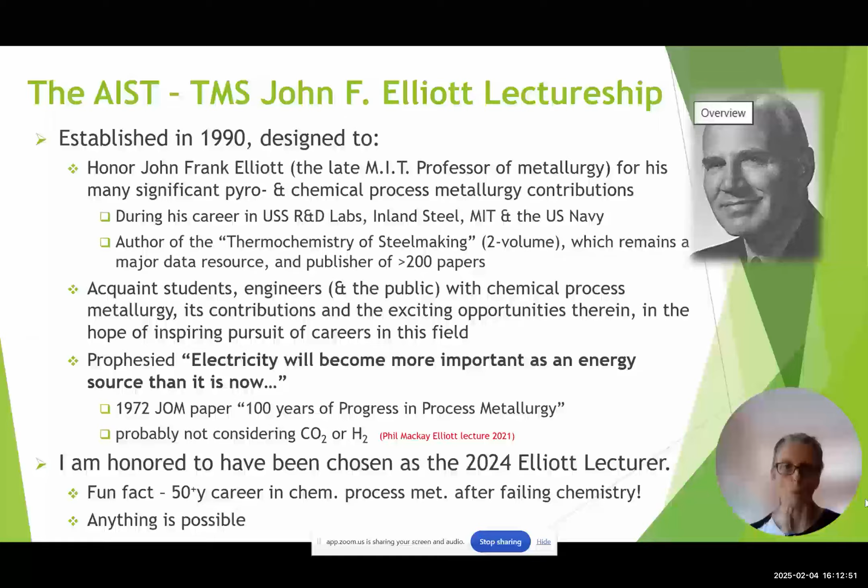Why green steel revolution? Net zero emission steelmaking using non-fossil fuel energy sources is the definition of green steel that I'm taking. Zero emissions iron making is crucial to greenhouse gas mitigation. Currently, it's not cost effective with fossil-based fuels.

The world is currently missing the 1.5 centigrade global warming target, which increased by 5 gigatons in 2022 over 2021. 34 gigatons came from the combustion of coal, oil, and natural gas. So why the green steel revolution?

The 2015 plan is to convert 800-year-old carbon-based blast furnace BOF steelmaking to electrically based 60-year-old EAF steelmaking and make major changes to its operations: carbon-free electricity, hydrogen-reduced iron, and green carbon and consumables. Increasingly disinterest and inability to comply with the solution is motivating out-of-the-box thinking for iron and steelmaking solutions.

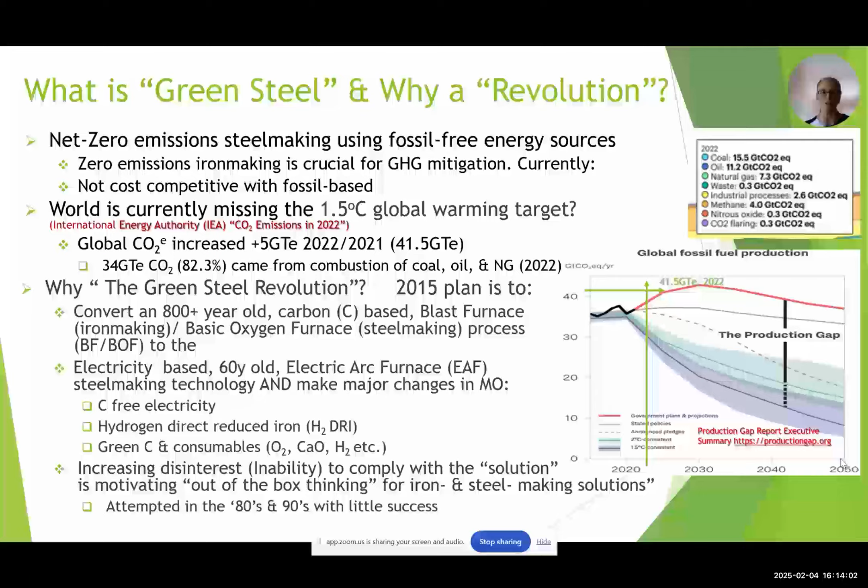Current steelmaking, from Zulhan 2013, it's a great chart: blast furnace steelmaking to a BOF, smelt reduction to a BOF also through a smelter, direct reduction in its various forms, be it shaft, rotary hearth, rotary kiln, or fine ores through the FinMet type process, to an EAF, and scrap 100% to an EAF. As you can see at the bottom here...

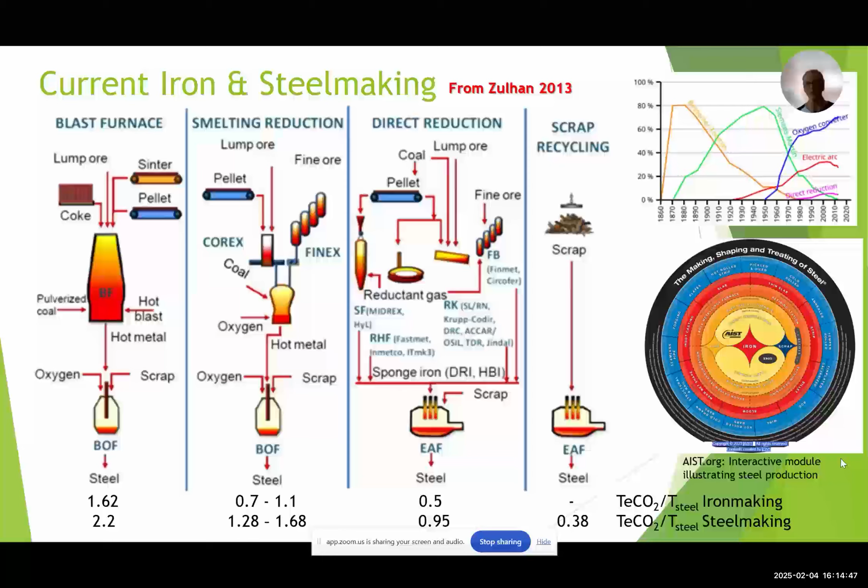The 2.2 tons of CO2 per ton of steelmaking drops down to 0.38 when we're looking at EAF steelmaking. And the right-hand globe here is the AIST's interactive module illustrating steel production, which you can access on their website.

I'm not going to go through this, but basically I'm showing the amount of carbon interactions in these equations for both the blast furnace and the EAF. So we're very dependent on carbon.

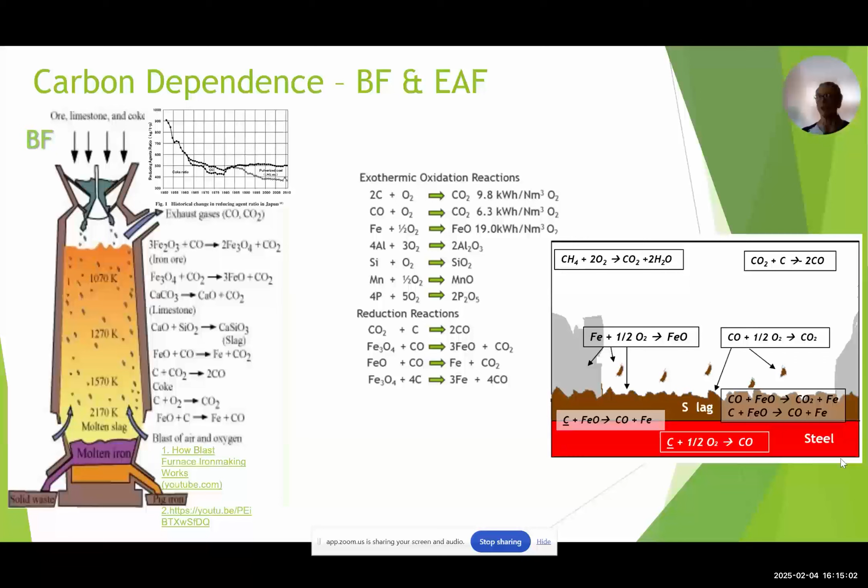The Paris Accord is demanding 0.2 tons of CO2 per ton of steel by 2050, and we're now at about 1.7. The major emissions, as you can see from this table, are from the blast furnace at 1.2, secondly from the coke ovens at 0.79, and thirdly from the EAF, but it's down at 0.24.

The chart here just shows the red blast furnace BOF steelmaking for various countries making over 10 million tons a year. The green is the EAF contributions. And as you can see, China is almost 54%, down from 57%, but it's also the largest contributor of greenhouse gases to the world at 28%.

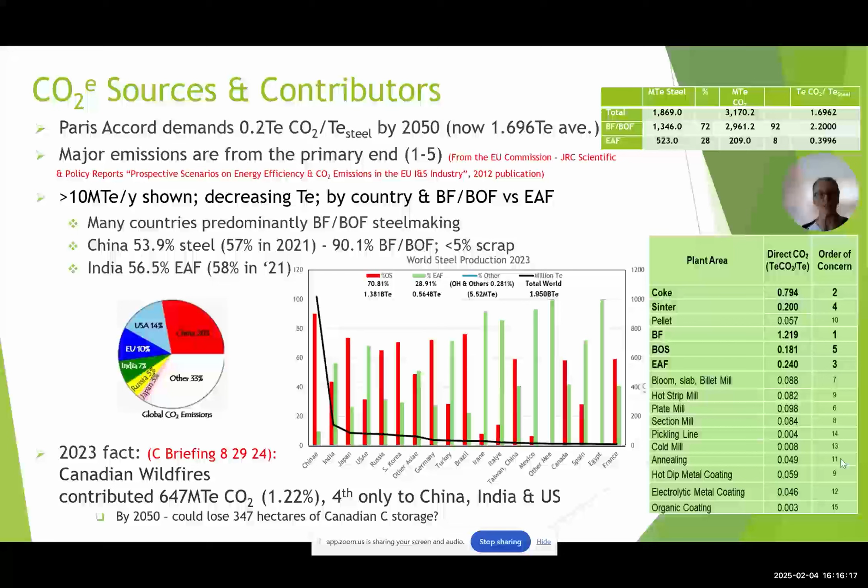Fact for information: from this year, the Canadian wildfires last year contributed 647 million tons of CO2, which is 1.22% of the world's generation. It's fourth only to China, India, and the US. And according to them, by 2050, 347 hectares of carbon sink could be lost because of the increasing temperatures.

So looking at the IEA's vision and the green challenges, the net zero conversion to 95% hydrogen DRI EAFs by 2070 is technically feasible, though fraught with challenges, and I'm going to look at those. They are exorbitant in cost and are driving new technology R&D from technology readiness level 3 to 7, some in less than 3 years. It's the most exciting era since the 60s when continuous casting was developed.

Green challenge number 1, as I've specified it, is build rates, which I believe are unreachable. Futures are predicated on the availability of green hydrogen, energy, carbon, and better qualified scrap.

From 1970 to 2020, DRI production averaged 2 million tons a year. By 2050, it's predicted we'll need 411 million tons of DRI per year, of which 211 million are hydrogen DRI, requiring 11.5 million tons of hydrogen, 692 terawatts of energy, 1,240 20-megawatt PEMs to create the hydrogen, and 810 EAFs. The supply chain is another issue.

Deliveries currently are 106 weeks on transformers post-COVID. Costs, some are 85% up on the pre-COVID costs.

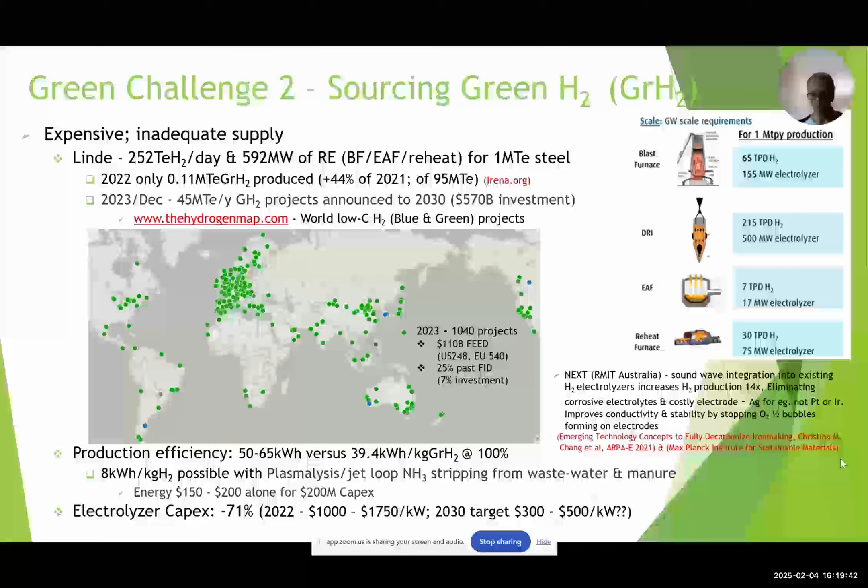Third challenge is resourcing renewable energy. We, as a steel industry, use 8% of the world's energy, and 0.3 to 1 kilograms of CO2 is produced per kilowatt hour, depending on the source. We need 1,437 terawatts by 2050, and that's a $2 trillion investment. There's not enough at the right price. We need a 50% cost reduction.

In 2022, 29% was renewable energy. The chart on the right-hand side shows predominantly all of the energy was basically from fossil fuels. In 2023, there was a 0.5 terawatt capacity add, and at 67% energy efficiency, 500 million tons of hydrogen would require almost 19% of the world's total energy. As you can see to the right here, the leading country for renewable energy, of course, is our friends from China. Hydrogen for energy is only going to be 2 to 3% by 2050.

And the other issue we need to look at is water. It's been overlooked, and we'll be lacking 30% in our green future.

Green challenges 5 and 6 are sourcing carbon and scrap. Historically, iron's been produced from renewables, but with the 20th century came electricity and coal because of deforestation. When OPEX became 20%, it forced minimization of energy, and biomass started to appear. Its use varies by world, as you can see from this graph, Brazil being the highest user, followed by, funnily enough, the United States, which was quite a surprise.

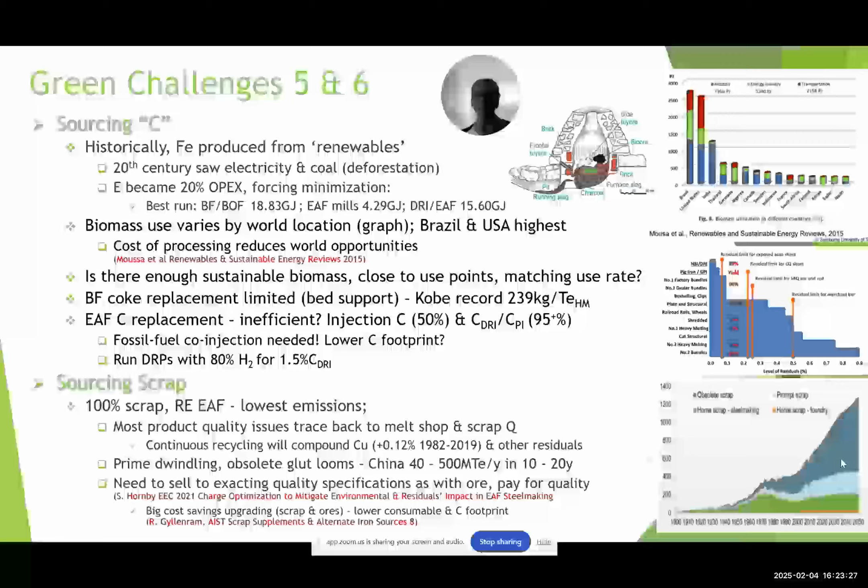Challenge number 7 is zero carbon hydrogen DRI in the EAF, which is inherent when you use 100% hydrogen. The EAFs now, as you can see from the chart here, use 55% electrical and the rest is chemical energy, with carbon being 23%. Carbon foams the slag, gives you a larger surface area. It enables degassing of the melt, nitrogen and hydrogen, increases heat transfer, and tons per hour yield.

It also reduces the FeO not only in the DRI but also in the slag, and it doesn't have any ash or volatiles. On the right-hand side here is something that ArcelorMittal put together quite a while ago, showing the increase in productivity, the reduction in kilowatt hours, the reduction in electrodes, and the increase in yield to almost 1%.

So zero or inefficient carbon is going to reduce chemical energy. It's going to increase the cost and lower the production. It's going to be more gangue. There's going to be more slag to get rid of. There's going to be greater electrode wear. You're going to need double the carbon input to the furnace. And we're going to have to redesign the EAF and the refractories because there will be carbon dissolution with the current system from slag erosion. We're going to have a deeper bath because we're going to need more slag to enable the reactions to occur.

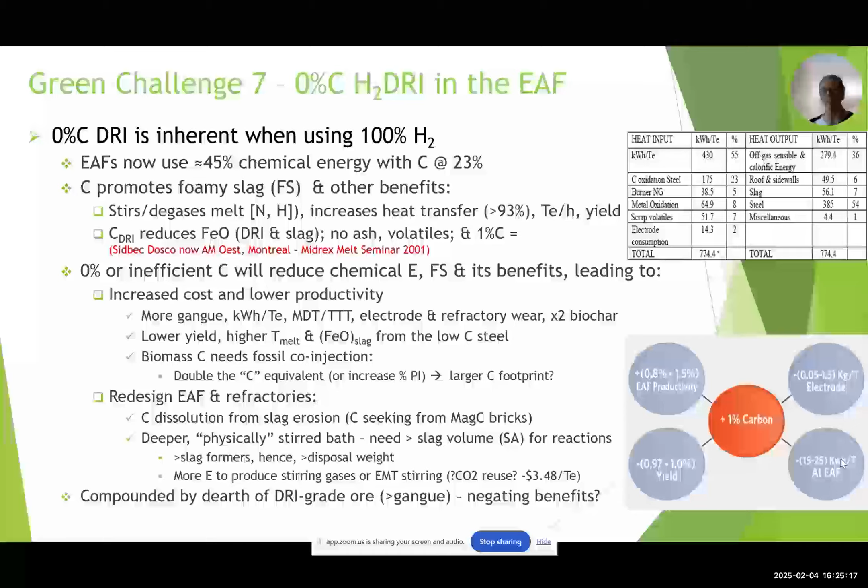Number 8 is sourcing DRI grade ore. Nominally 3 to 4% is DRI quality, which is greater than 67%. In 2021, Australia, Brazil, China, and India mined 73.8% of the world ore, but the quality is deteriorating. Iron's dropped 2%, silica and alumina has increased 2%, and the phosphorus has increased 0.02%. Upgrading some of the ores is very difficult, Pilbara in Western Australia especially, and it's also costly.

So the suggestion now is that we redirect the DRI to a SAF, a submerged arc furnace, or OSBF, and then, if we can upscale them, put that to either a BOF, EAF, or make pig iron. You can see that's the chart here to the right, the options. Wimmer from Prime Metals has put this chart together at the bottom. The lighter colors are actually the cost of transformation. The darker cost are the cost of the DRI. And he's showing 67.5% is the break even to go with electric furnace versus OSBF below 67.5%.

So obviously some new technologies are required for low grade ores. Electra is iron from ores that can be as low as 30% iron. It's 60-degree temperature, and Nucor is interested in that one. We have Calix that is doing fines recovery from low-grade ore. And Swinburne University and CSIRO are looking at the highly reducible fluxed lime magnetite pellets. That process would reduce the process to ore, to iron, by a whole step and at a lower temperature.

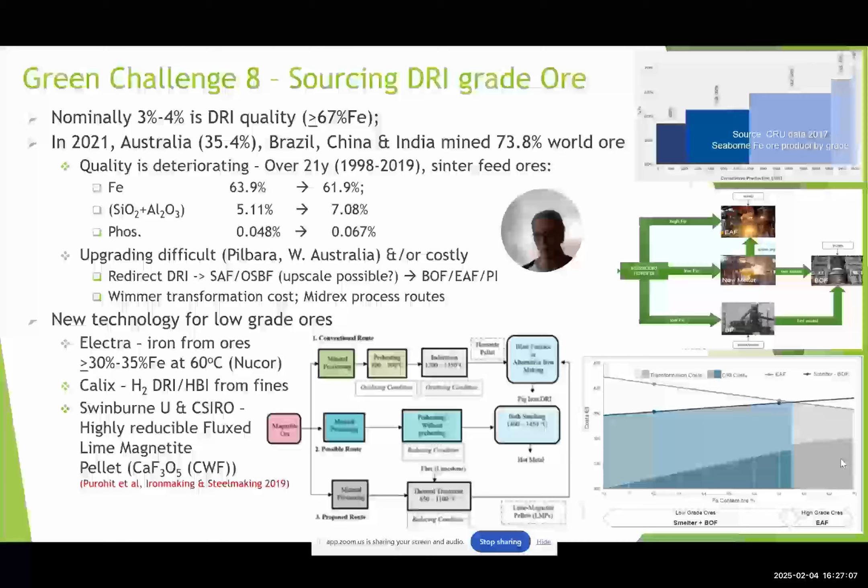Number 9 is the CCUS, carbon capture, use, or sequestration. Substantially, it's below net zero requirements. 35 global plants only capture 0.12% of the global CO2 currently. The 200 new ones that have been announced are only going to increase it by 0.6%. There are 10 pilots and one-of-a-kind demos that have been funded recently by the DOE in the US. There's a great website here for the IEA, which produces these great charts, and you can change what you want to look at. This looks at the point source, but you can look at project type, region, sector.

Iron and steel is the smallest of the installed capacity. Relatively high conversion costs because we need carbon-free hydrogen to chemically stabilize the CO2, and the fixation is limited. Sequestration is also an issue because it's geographically challenged, and it's temporary if no mineralization occurs. They're slated to be the catch-all solution for heavy industry. However, they apparently don't make sense economically, environmentally, or energy-wise.

The effectiveness and relevance of CCU/CCS varies widely across applications, and it's suggested that worse emissions reduction than alternative solutions may be appropriate for DRPs. EU policies are funding a lot of work in this direction, but perhaps at the expense of underfunding more meaningful decarbonization solutions.

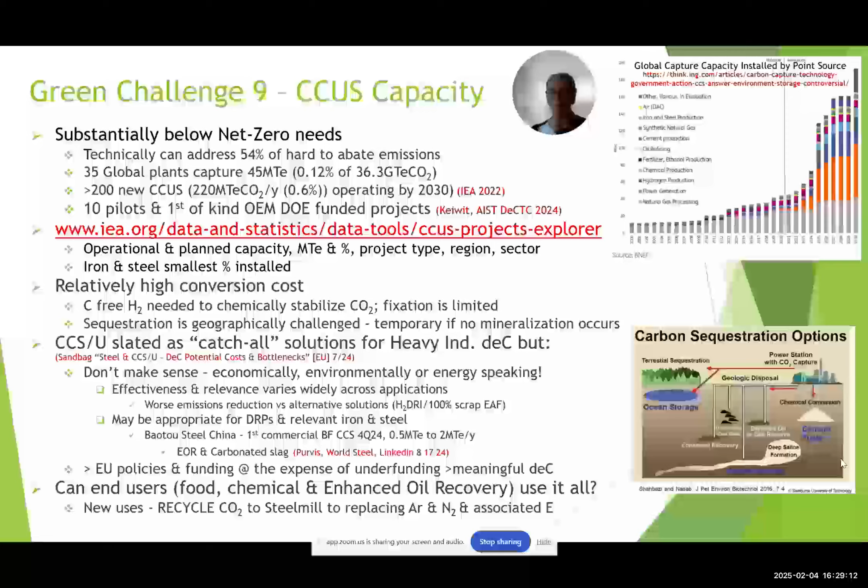Projects are faltering because FID is negative. There's no instant gratification, and they're not meeting promised funding. ArcelorMittal Gijon is still in FEED because of hydrogen costs. Germany is waiting for funding, and ArcelorMittal has been reported to be 2 years behind because of costs. Algoma has seen a 25% increase in pricing. Blast furnace and BOF revamps and orders are now on parity with DRI and EAF orders, as you can see from globalenergymonitor.org.

So, on to new technology developments. Concurrent with the conversion to hydrogen DRI EAF steelmaking, R&D into carbon, electricity, hydrogen and electrolysis has been ongoing. The three circles show these overlapping areas specifically: biomass, CCU, CCS, hydrogen reduction and production, electricity, and also we need to look at upscaling non-steel old technologies such as SAF, OSBF, and induction furnaces.

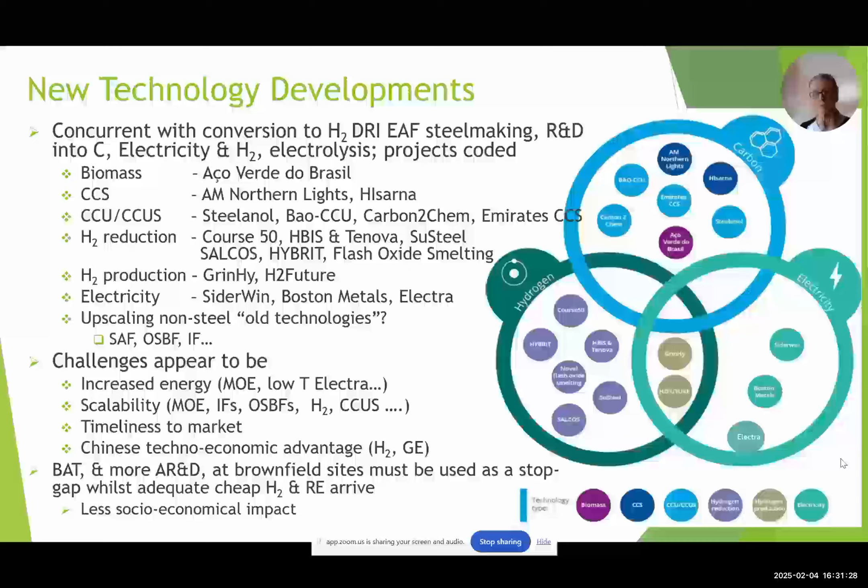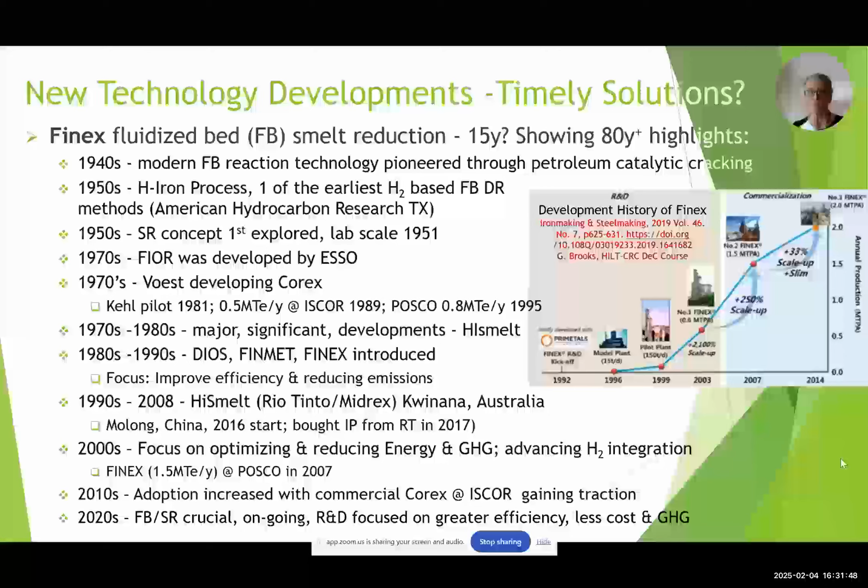New technology developments — are they going to be timely? This is an example of the Finex. The chart on the right-hand side says they were developing for only 15 years, but if you look at the history, it's actually 80 years. Again, with HIsarna, it took 38 years from the cyclone converter concept to develop a cyclone converter smelt reduction furnace.

If we look at electric smelting furnaces, excess lean ore and the unsuitability of the resultant DRI for EAF melting have ESFs hailed as the solution. However, we need to upscale them, as shown in the top chart. We have circular at 1.1 million tons and rectangular at 1.4 million tons currently. We also need to optimize power intensity, sustainability of renewable energy and electrodes, and integrate into the existing infrastructure. BlueScope, BHP, and Rio Tinto are exploring these for low-grade Pilbara and medium-grade ores.

However, please note BlueScope is also relining a blast furnace at Port Kembla. Fortescue, Primetals, and Voestalpine are developing a prototype HYFOR furnace at 900 degrees C fluidized bed. They've had a pilot at 1 ton an hour running since 2021, and will put in a 6 ton an hour demo in Linz by 2027. FID is due this year. It processes all ore types and is modular for tonnage. The industrial HYFOR plus a smelter is under MOU with Fortescue for liquid metal production.

There's also POSCO's fluidized bed HyRex — hot hydrogen reduction, ESF DRI melting — and the ESF will replace what was the Finex's melter gasifier. They're going to put in a 300,000 ton a year plant in 2028, with commercialization expected by 2030.

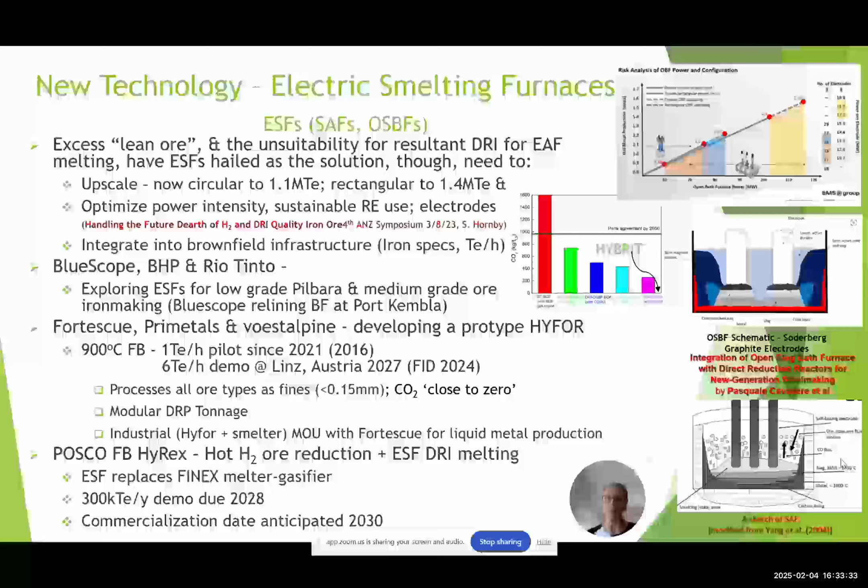Biomass net zero ironmaking is a resurgence of what used to be. Brazil is the largest biomass producer, and they are making iron using charcoal and blast furnaces. They have 88% renewable energy currently.

Logistically and geographically, sustainability considerations need to be looked at, matching reactors to supply, and we need to do an emissions life cycle analysis because you need to consider changes in land use and harvesting versus other opportunities. Carbon neutrality can be achieved, maybe — Redsmelt in Brazil says they are able to do so with their process.

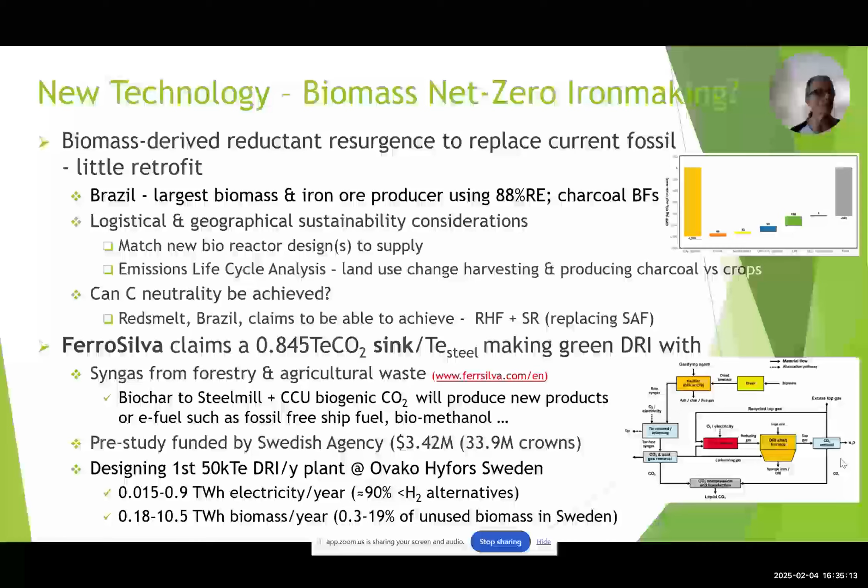FerroSilva from Sweden claims they will actually achieve a 0.85 ton CO2 sink per ton of steel, and they have the calculations posted. They're using syngas from forests and agricultural waste, with biochar and the steel mill and CCU biogenic CO2 giving them new products and the sink, looking at fossil-free ship fuel and biomethanol. There's a pre-study ongoing, sponsored by the Swedish government, and they're designing a 50,000 ton a year DRI plant to be placed at the Ovako Hofors plant, using up to 0.9 terawatt hours of electricity per year and up to 10.5 terawatt hours of biomass.

Another new process with solid DRI is Calix. It's a flash reduction of fines to produce the DRI, multi-patented, pilot tested, and it's 2.5 years since its inception. It processes fines and waste materials, proven to up to 98% metallization with Australian ores, using up to 1.3 megawatt hours per ton of HBI, with approximate pricing between $410 to $520 depending on further development.

It uses green hydrogen in the renewable energy reactor to produce this zesty green iron and ultimately zesty steel. The hydrogen is only used to reduce the ore, so there's targeting stoichiometry for the hydrogen use. Indirect heating improves the efficiency, lowers the temperature. There is an ARENA, Australian renewable energy study, for a 30,000 ton a year demo plant.

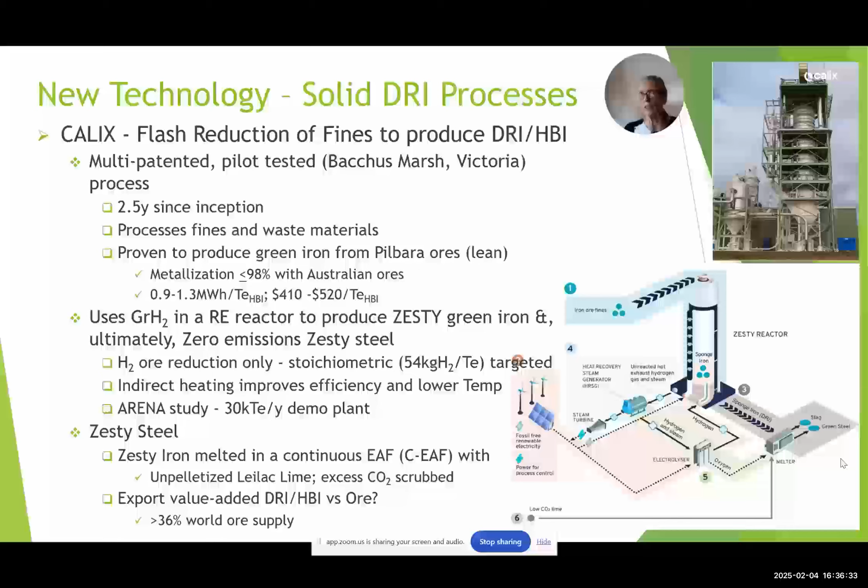Zesty Steel takes the iron and puts it through a continuous EAF with unpelletized Leilac lime, and excess CO2 is scrubbed. It's offering an opportunity to export value-added DRI HBI from Australia.

Shaft furnaces quickly, they're stated at TRL 6 to 8. HYBRIT has been producing hydrogen DRI EAF steel at 1 ton of DRI an hour, 5,000 tons a year. It's proved 100 cubic meters of lined rock storage, and they're going to need 120,000 cubic meters when they move to the 1.3 million ton a year demo plant that's going to be operational by 2026.

We also have hydrogen rotary kilns that can run on solar and wind renewable energy sources. There's a 0.5 ton an hour Hylron DRI plant in Germany running on 14 megawatts of renewable energy since the first quarter of '23.

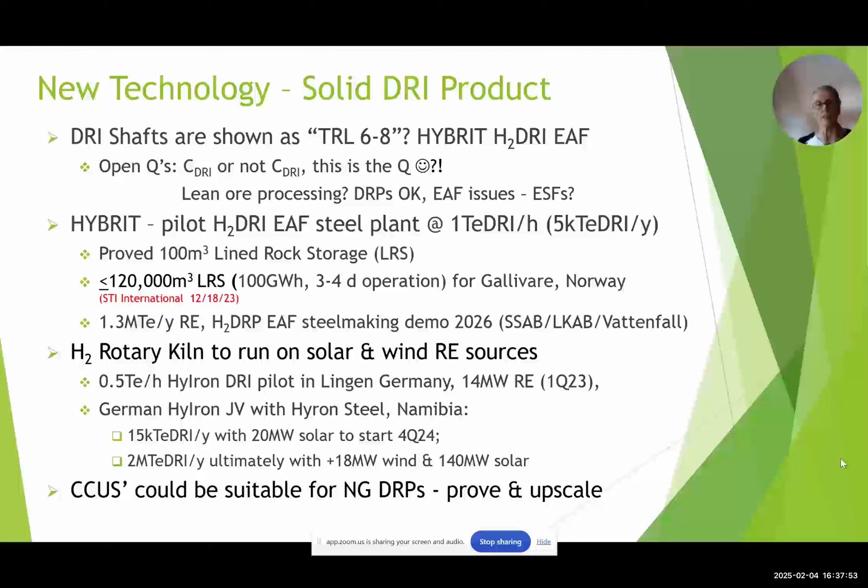They're going to do a joint venture with Hyron Steel in Namibia with a 15,000 ton a year DRI plant, 20 megawatts of solar to start with at the end of this year. There's also a 2 million ton of DRI per year plant ultimately with 18 megawatts of wind and 140 megawatts of solar. CCUs could be appropriate for DRPs if they're proven and upscaled.

So electrolytic iron making, there's high and low temperatures. The redox is simple: the iron oxide gives iron at the cathode and oxygen at the anode, and the ore's oxide anions are the reducing agents. The high temp process dissolves ore in the molten electrolyte, giving liquid iron, technically faster kinetics, but also much higher capex and opex.

ArcelorMittal and others have explored the MIDEIO ULCOS process from 2004 to 2012. Low temperature is solid iron processing, slower rate, lower capex, lower renewable energy, and ArcelorMittal Siderwin is a demo project at 110 degrees.

Boston Metals is the most well-known, I believe, running at less than 2,000 degrees. It's an MIT spin-off. It can process a wide range of ore, but its productivity is limited by the cell and current densities in Faraday's law. Critical factors are recarburizing, anode longevity and type, and the scaling.

It should be noted that they're expecting 400 cells to produce this - and this is an aluminum plant just to demonstrate the number of cells there - 400 cells to produce 500,000 tons a year of steel. So if you put that into a 5 million ton a year plant, you're going to need 4,000 of these in place. There's been a lot of DOE funding.

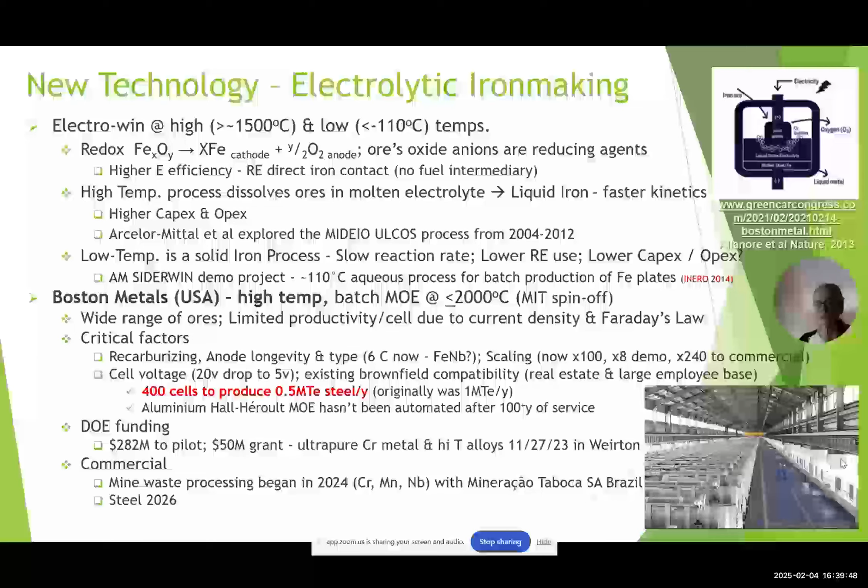282 million for the pilot, and a 50 million grant currently to win ultra pure chrome, metal, and high temperature alloys. And commercially, they are already commercial for mine waste in Brazil, and they're expecting steel to be commercial by 2020... sorry, by 2026.

A low temperature electrolytic process is Electra in Texas. It's backed by Amazon and Bill Gates, less than 3.5 years from inception. It's converting low-grade iron ore to 99% or higher iron, electrochemically and hydrometallurgically, creating a plate - I'm not sure how thick - and they're going to charge that to EAFs with quality scrap. Modular in design, and they reckon a 90% reduction in CO2.

There are also some Ulcos offshoots: Siderwin with ArcelorMittal, which I mentioned, Ulcowin, which is another ArcelorMittal low temperature alkaline electrolysis, and Ulcolysis, which is basically equivalent to our friends Boston Metal.

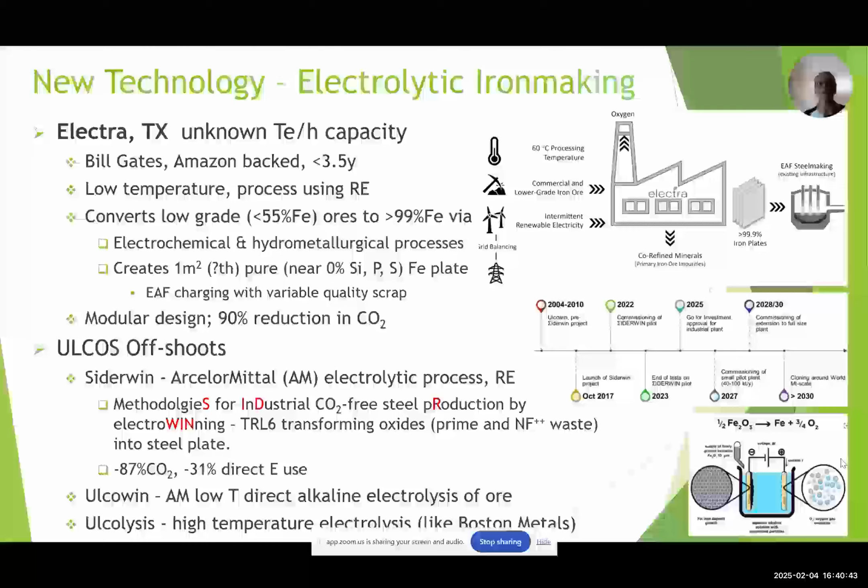Plasma ironmaking is electrode to ore plasma in a conventional furnace with very energetic exothermic hydrogen species which overcome the endothermic hydrogen reactions, enabling efficient redox chemical reactions. Enhanced kinetics, lower temperatures, and there's a pre-pilot demo at the University of Loeben with Voestalpine called SuSteel.

Historically, it's been overpriced and failed in the 80s and 90s. We need lower capex and reactor design for the reactant efficiency. Its refractory life needs protection, and we need to have continuous production.

Some of the examples are H2PlasmaRed. There's a 100 kilogram scale pilot, which will be then retrofitted to a DC arc furnace. There's an alumina bauxite waste of 180 million tons a year, turning into iron making feedstock.

And there's - I already mentioned - the plasmalysis, which technically will strip ammonia from wastewater and manure and allow 8 kilowatt hours per kilogram of hydrogen production.

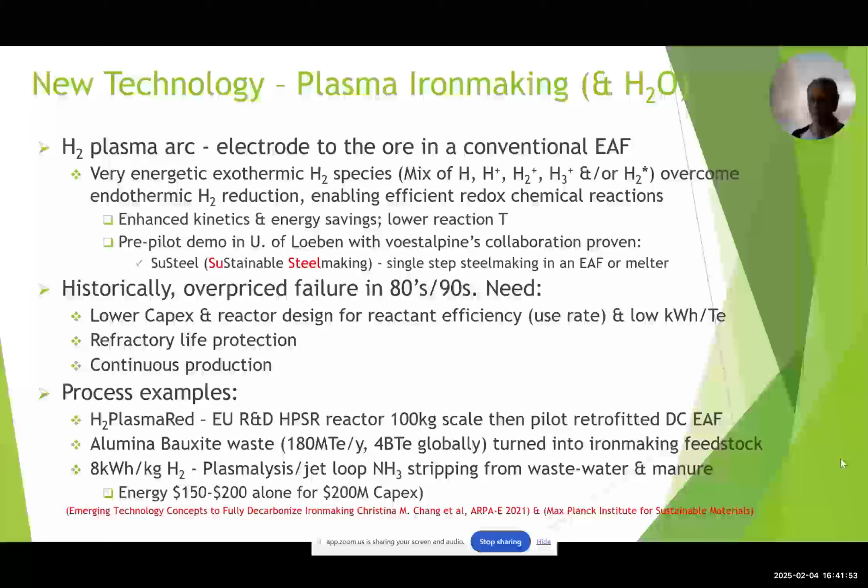So brownfield opportunities are the biggest with the blast furnace at 1.2 tons of CO2 per ton of iron, and we're going to anticipate 50% of the ore-based steelmaking still in 2050. So we're seeking best available technology. Improved measurement in the mills will allow us to control what's going on.

If we intensify scrap and HBI use, we can increase productivity and reduce coke. It's shown by IIMA that 7% coke is available for every 10% metallization, and Brooks et al. at Swinburne concur, as you can see from the graph down here at the bottom.

Biochar substitution for coke and PCI is limited for the coke, as we've already said, because it supports the bed in the furnace. Hydrogen or natural gas injection into the tuyeres can reduce the CO2 by 9% versus coke alone.

Hatch, on the other hand, has said that PCI plus 35 kilograms of 900 degrees C hydrogen can give you a 20% reduction in CO2, but also energy to the mill and 100 kilogram coke reduction, but it's expensive.

If you add top gas recycling and CCUs to this, you can produce an 80% reduction in CO2, which will bring it down to 0.4, which is close to that of an EAF 100% scrap.

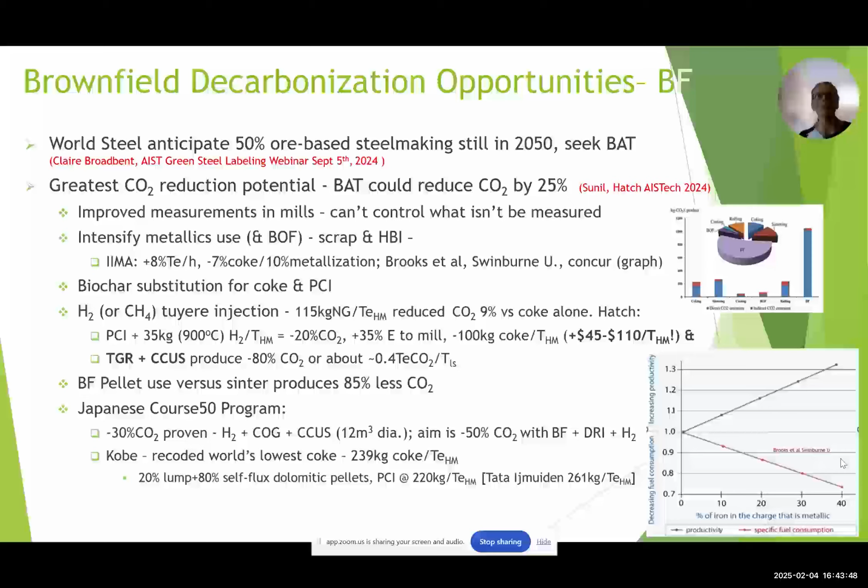With the BOF, increasing scrap use increases productivity and decreases CO2. Both charts on the right-hand side here were put together by Swinburne University students using plant data. They show increasing scrap reduces heat loss.

For 35% scrap, you're going to have a heat loss that's less than 0.9%. If you drop down to 10%, then you're looking at a heat loss that's high at 6.75. You're going to require smaller scrap, preheated and continuously fed, probably.

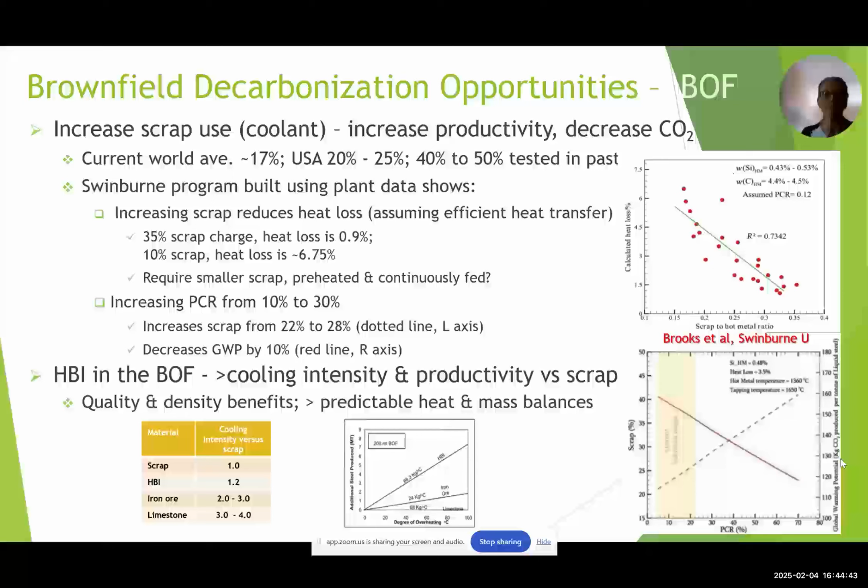Increasing PCR on the bottom from 10 to 30%, you can see an increase in scrap from 22 to 28% on the dotted line, and global warming potential drops by 10%. These two charts basically show HBI and the BOF have greater cooling intensity and productivity than you have with scrap.

If we beneficiate scrap, maximize its use, and avoid using the DRI, HBIs of the world or base metallics, then we're going to have a much lower CO2 count. If we shred our scrap in-house, improve quality, density and yield, then we will also have the added benefit of fluff sales, which is non-ferrous and definitely profitable.

We also need continuous analysis in the plant. We need to develop residual and sensitive steel grades because the residuals are going to increase with continuous recycling and more obsolete scrap coming on the market, as we said already.

If we preheat the combustion air, we can reduce the kilowatts and the meltdown time. If we substitute hydrogen for natural gas in the oxy-fuel burners, we can save more CO2. And if we look at putting value in use of materials with off-gas analysis and heavy control of the EAF, we can maintain lower cost steel.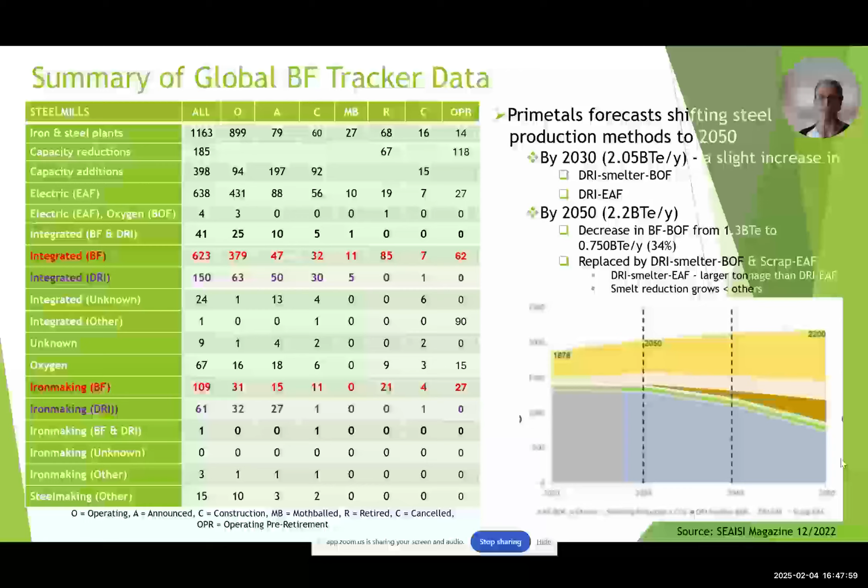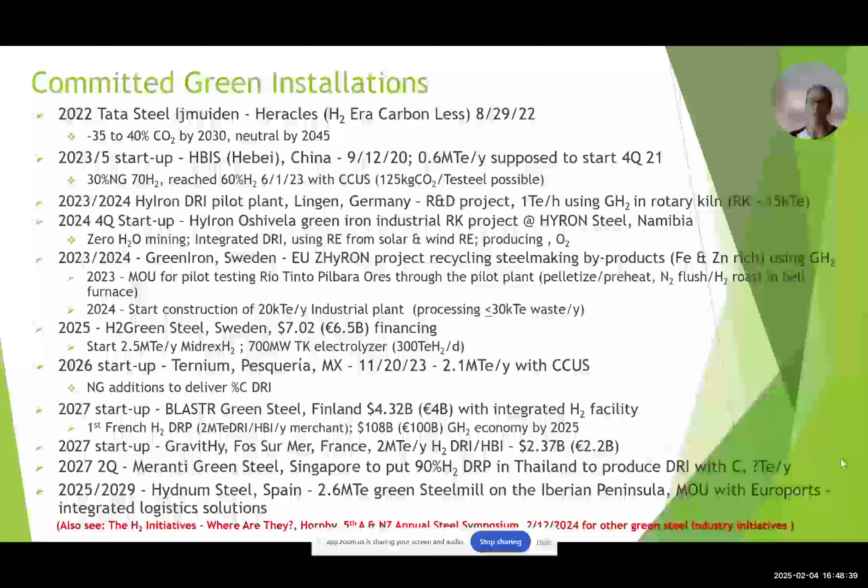There's committed green steel installations here. I also will not go through this. I will let you have a copy of the report to read it. But there's some substantial startups coming in up to 2025 and 27.

So in summary, the scale of progress and investment falls short of the required 1.5 degrees C global warming need. Hydrogen DRI EAF steelmaking is technically viable, but challenged with build rates, availability of green consumables, and predominantly conversion costs and the FID failings. We've got a catch-22 situation.

We need to guarantee the cost of low carbon energy and hydrogen, but conversely, those who make them need to see the demand. We need to decouple iron and steel making, sort of ore and iron making with renewable energy and steel making, and we still need the blast furnace pig iron.

In the meantime, we need to look at black steel taxes for non-compliant nations, best available technology and applied research and development of brownfield sites as a more techno-economic solution and stopgap. And the green steel revolution has spawned innovation and new technologies. Questions do remain.

Innovation to market and build rates, can they be sped up? Can the CCUS truly be a long-term fix for the steel industry? And also, can we improve the hydrogen efficiency and volumes and cost?

So there are major career opportunities which exist to further this green steel revolution. And I think it's an exciting time to be in the industry. Part of me regrets that I'm at the end of my career.